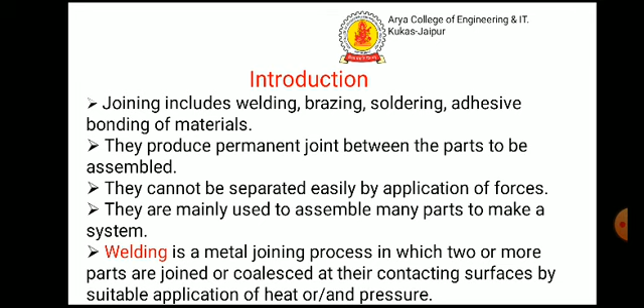Welding. Welding is a metal joining process in which the joining of metals is done by the application of heat with or without the application of pressure. Sometimes welding is done just by applying heat alone with no pressure applied. In some cases, both heat and pressure are applied, and in other cases, only pressure is applied without any external heat.

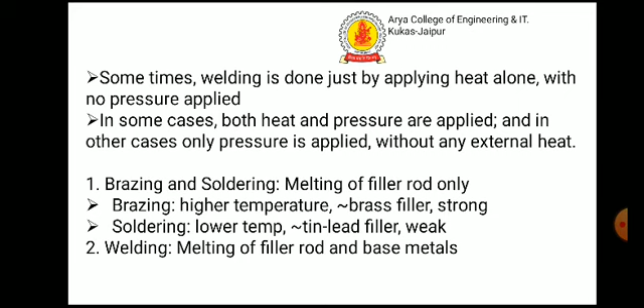Brazing and soldering: melting of filler rod only. Brazing: higher temperature, brass filler, strong. Soldering: lower temperature, tin-lead filler, weak. Welding: melting of filler rod and base metals. Two categories of welding process.

Mainly welding is of two types, fusion welding and solid state welding. Fusion welding. Fusion welding is accomplished by melting the two parts to be joined, in some cases adding filler metal to the joint. Example, arc welding, resistance welding, oxy-fuel gas welding.

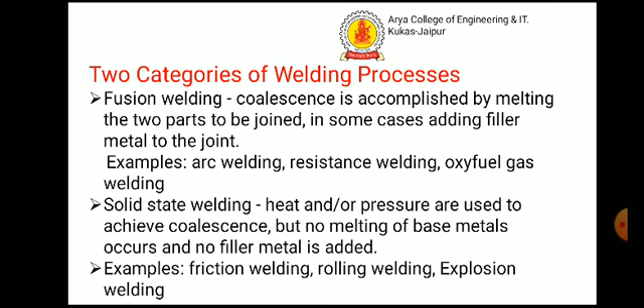Solid state welding: heat or pressure are used to achieve coalescence but no melting of base metals occurs and no filler metal is added. Example, friction welding, roll welding and explosion welding.

Now, arc welding. It is a fusion welding process in which the melting and the joining of metal is done by the heat energy generated by the arc between the work and electrode. An electric arc is generated when the electrode contacts the work and is then quickly separated to maintain the gap.

Actually, a temperature of 5500 centigrade is generated by this arc. This temperature is sufficient to melt most of the metals. The molten metal consists of base metal and filler.

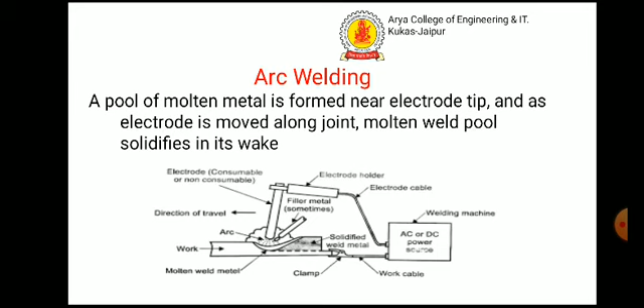Electrodes. Two types of electrode are used, consumable and non-consumable. Consumable electrode. This is the source of filler rod in arc welding. The electrode is consumed by the arc during the welding process and added to the weld joint as filler metal. The consumable electrode will be changed periodically as it is consumed for each welding trial.

Non-consumable electrode. The electrodes are not consumed during arc welding. Some depletion occurs because of vaporization. Filler metal must be supplied by means of a separate wire that is fed into the weld pool.

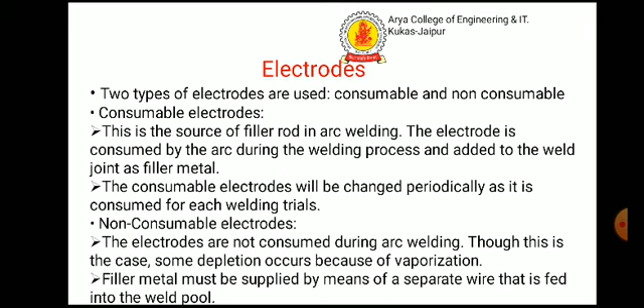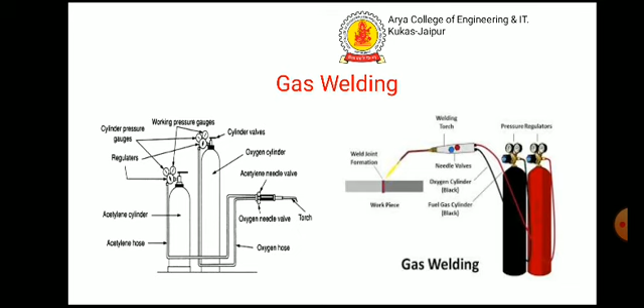Gas welding. Gas welding is also a type of fusion welding. Now, diagram. Gas cylinder: two separate cylinders, oxygen and acetylene. Black color for oxygen and maroon color for acetylene.

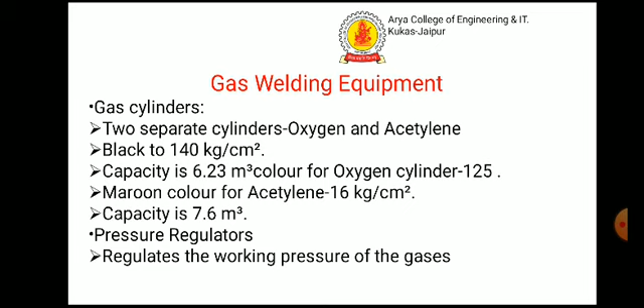Pressure regulator regulates the working pressure of the gases. Working pressure of oxygen is between 0.7 and 2.8 and acetylene 0.07 to 1.03 kg per centimeter square. Working pressure depends upon the thickness of the workpiece to be welded. Pressure gauge: 4 gauges provided, 2 on the oxygen cylinder and 2 on the acetylene cylinder.

The oxygen cylinder gauge indicates the pressure inside the oxygen cylinder, which keeps lowering as the gas is used up. The other indicates the outgoing oxygen pressure through the hoses. Both oxygen and acetylene gas can be satisfactorily piped through reinforced flexible rubber hose. Normally, the green hose is used to carry oxygen and the red hose is used to carry acetylene. Green hose means black hose.

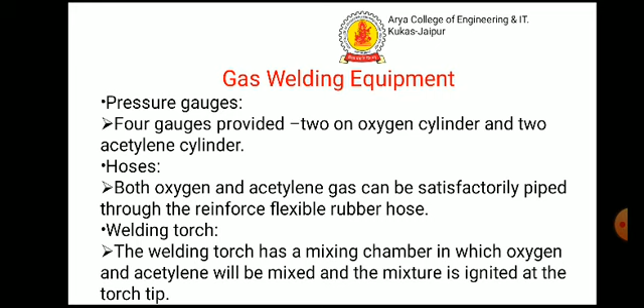Welding torch. The welding torch has a mixing chamber in which oxygen and acetylene are mixed and the mixture is ignited at the torch tip. The pressure of oxygen and acetylene can be equal. To extinguish the flame, fuel gas should be turned off first, followed by the oxygen. Gas flow to the torch is controlled with the help of 2 needle valves in the handle of the torch.

Welding tip. The welding tip is also called a nozzle. The oxyacetylene gas is ignited by a spark lighter or a flame lighter and it burns with a flame.

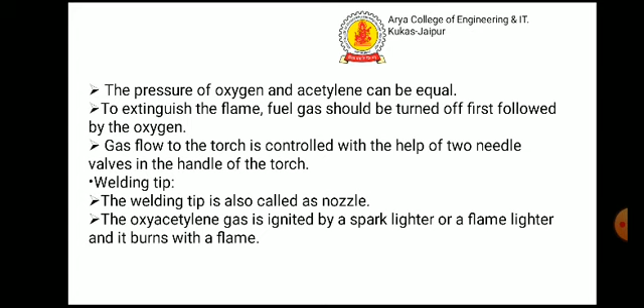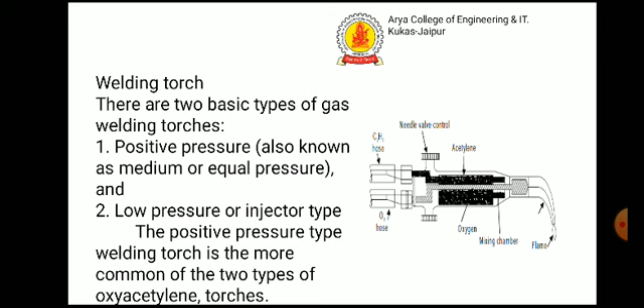Welding torch. There are 2 basic types of gas welding torch: positive pressure, also known as medium or equal pressure, and low pressure or injector type. The positive pressure type welding torch is the more common of the 2 types of oxyacetylene torches.

Metals to be welded are melted by using a gas flame. The flame is produced at the tip of a welding torch. The common gases employed in gas welding are oxygen and acetylene. The flame only will melt the metal, so additional metal to the weld is supplied by the filler rod. A flux is used to remove impurities.

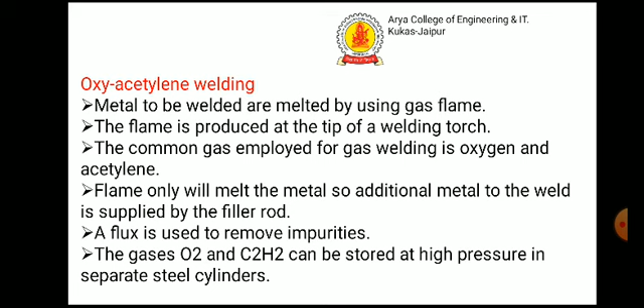The gases O2 and C2H2 can be stored at high pressure in separate steel cylinders. Flux: the purpose of using flux, which is in a powder or liquid form, is to prevent oxidation and remove the impurities. The common fluxes used in gas welding are made of sodium, potassium, lithium and borax.

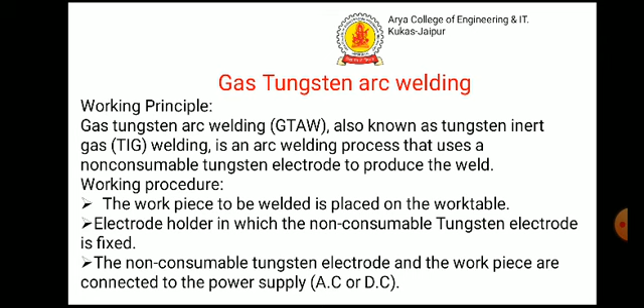Gas tungsten arc welding. Gas tungsten arc welding, also known as TIG welding, tungsten inert gas welding, is an arc welding process that uses a non-consumable tungsten electrode to produce the weld. Working: the workpiece to be welded is placed on the work table. The electrode holder holds the non-consumable tungsten electrode. The tungsten electrode and the workpiece are connected to the power supply.

By supplying electric power between the electrode and the workpiece, the inert gas from the cylinder passes through the nozzle of the welding head around the electrode. The inert gas surrounds the arc and protects the weld from effects, thus defect-free joints are made. Filler metal may or may not be used.

By varying the types of flames, we use neutral flame, carburizing flame, and oxidizing flame in gas welding. Neutral flame is obtained by supplying equal quantities of oxygen and acetylene. Carburizing flame, also called reducing flame, is obtained by supplying more acetylene than oxygen. And oxidizing flame is obtained by supplying more oxygen than acetylene.

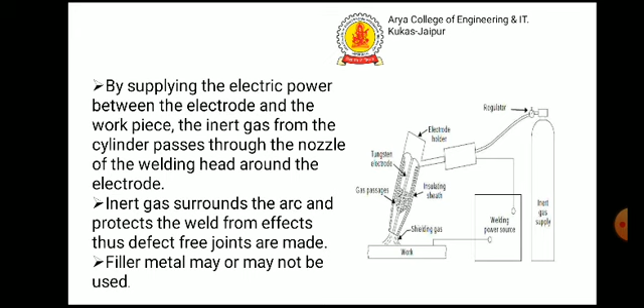Types of joint: butt joint, corner joint, lap joint, T-joint and edge joint. In a butt joint, the axes are the same and pass through the line.

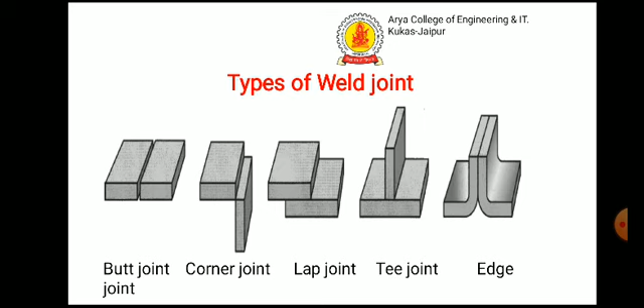Brazing. In brazing, a non-ferrous alloy is introduced in a liquid state between the pieces of metal to be joined and allowed to solidify. In brazing, the filler metal has a melting temperature above 450 degrees centigrade but below the melting point of the base metal to be joined. The joint produced is stronger than soldering. This process offers better corrosion resistance.

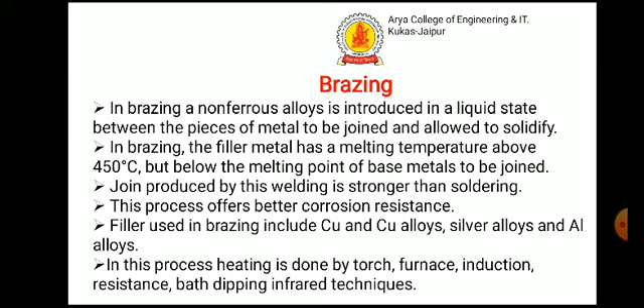Filler metals used in brazing include copper and copper alloy, silver alloy and aluminum alloy. In this process, heating is done by torch, furnace, induction, resistance, bath dipping, or infrared technique. Brazing methods: these are the 6 types of brazing method. Torch brazing: the source of heat for brazing is a gas flame torch. It may be oxyhydrogen or other gas flames.

Dip brazing. In dip brazing, the pre-assembled metal joints are dipped in a bath of molten brazing metal. The molten brazing metal bath provides both the required heat and the brazing metal for the joint. It is usually adopted for small parts. Salt brazing. In salt brazing, the assembled parts are dipped in a bath of molten salt kept at a temperature slightly above the melting point of the brazing metal.

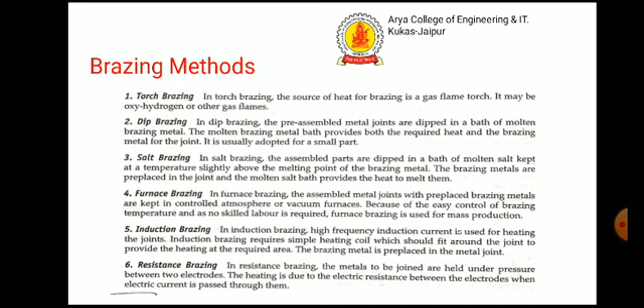Furnace brazing. In furnace brazing, the assembled metal joints with preplaced brazing metals are kept in a controlled atmosphere or vacuum furnace. Induction brazing. In induction brazing, high frequency induction current is used for heating the joints. Resistance brazing. In resistance brazing, the metals to be joined are held under pressure between the two electrodes.

Soldering. Soldering is similar to brazing and can be defined as a joining process in which a filler metal with melting point not exceeding 450 degrees centigrade, because soldering temperature is below 450 degrees and brazing temperature is above 450 degrees centigrade, is melted and distributed by capillary action between the faying surfaces of the metal parts being joined. As in brazing, no melting of the base metals occurs, but the filler metal wets and combines with the base metals to form a metallurgical bond.

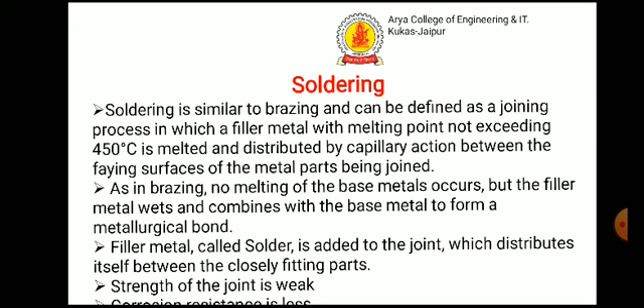Filler metal called solder is added to the joint, which distributes itself between the closely fitting parts. Strength of the joint is weak and corrosion resistance is less. Difference between brazing and soldering: brazing is used for joining dissimilar metals, pipes, copper tubes, etc. Soldering is used to make electrical connections, printed circuit boards and joining light sheet metal.

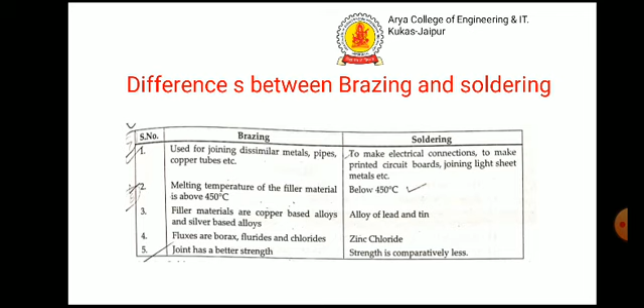The brazing temperature of the filler material is above 450, and soldering temperature is below 450 degrees centigrade. Brazing filler metals are copper base alloy and silver base alloy, and soldering uses an alloy of lead and tin. Brazing fluxes are borax, fluorides and chlorides, and soldering uses zinc chloride. A brazing joint has better strength, and soldering strength is comparatively less.